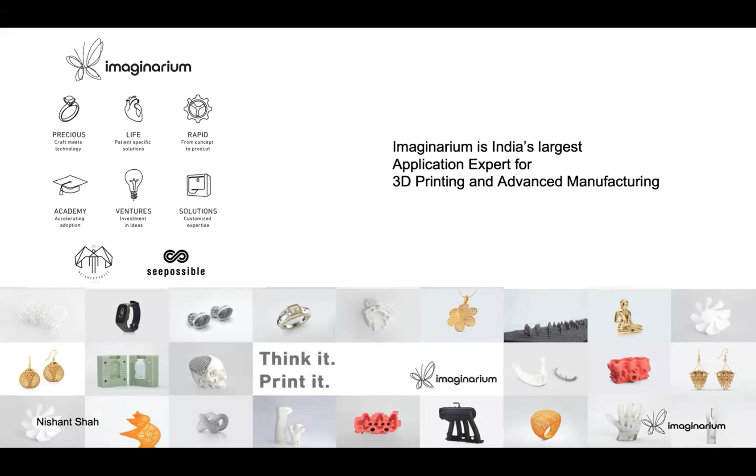To give you a brief about Imaginarium, we have been a service provider of 3D printing and other ancillary services for over 15 years now. One of our verticals, Imaginarium Rapid, also deals with automobile industries extensively, right from the OEMs to the tier 1 suppliers to part manufacturers. I'll give you a brief about Imaginarium later in the presentation, but I'll quickly jump on to what we do for the automotive industry.

So here are some of the kind of parts and applications that we currently work with within the automotive industries. Starts with visual models. Everyone needs a visual model. Everyone wants to look and feel and see how their next part or next car or next product is going to look like. So we do a lot of class A visual models for them.

Then we come to functional parts where we actually manufacture parts where they check the fit, form, and function. It might be a critical part, it might be a non-critical part. Then there is also a huge scope for spare parts, where there have been quite a few cases where a lot of companies have models which are almost redundant now, and it's difficult getting those spare parts manufactured because they're not in inventory or the designs have been lost somewhere. So we help them recreate and manufacture those spare parts. We also do a lot of changeover parts, jigs and fixtures, and obviously production parts as well, which is quite interesting.

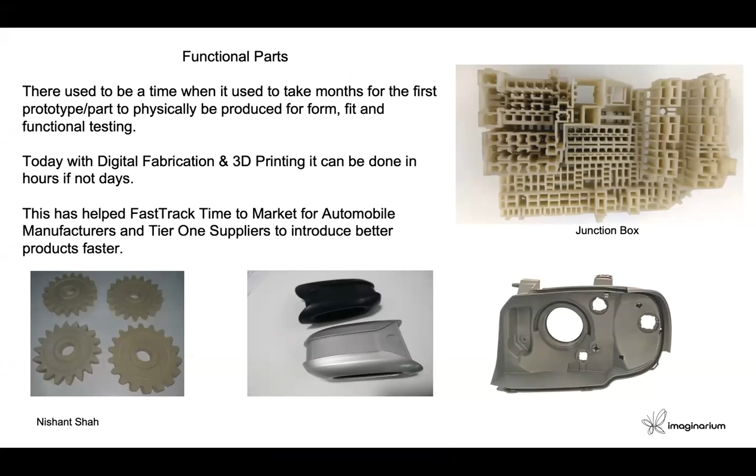Coming to functional parts - obviously as you all know, a few years back or maybe a decade back, it used to take months for people to get the first actual part after they've designed it, to actually test it for functionality, for fit, form, function. 3D printing has helped fast track this time, and it has come down to hours, if not days.

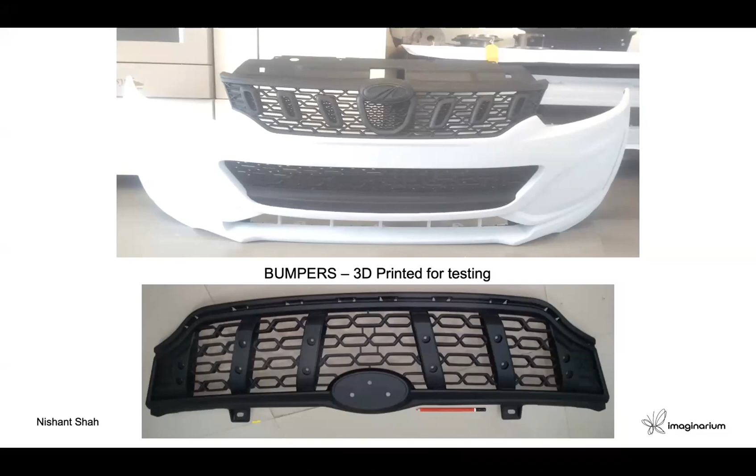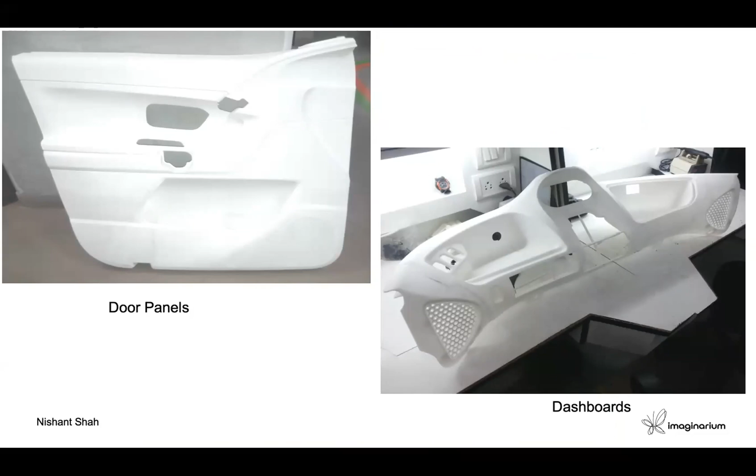Some examples are complete bumpers for automobiles. These are complete life-size bumpers fit on vehicles for fitment and aesthetic tests. We also have dashboards and door panels. These are all really large live parts which are then retrofitted into an actual vehicle, called a proto build, where the fitment and aesthetic values are checked before going into production.

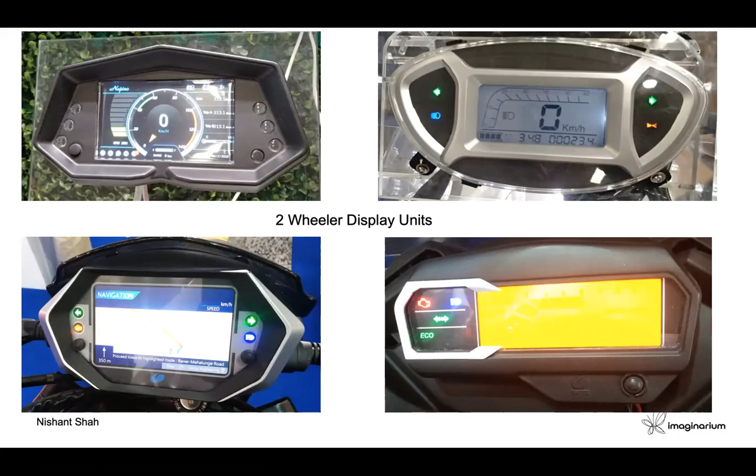Another opportunity is display units. Using transparent materials for 3D printing along with some conventional technologies, we're able to do display units for two-wheelers. These can go into shows or into actual vehicles for testing, and they are all functional parts, not just visual models.

Air intake manifolds are something we take pride in doing, and we've been doing it for over 3 or 4 years. The challenge with most air filter assembly and air intake manifold manufacturers was getting the real material - they wanted PA6 glass filled, which wasn't completely available back then. So we partnered with Solvay, a materials manufacturer, and dedicated one machine to developing this PA6 glass filled material. We did multiple trials over 6 or 7 months and proved we could print in polyamide 6, 20% glass filled material.

Currently we're the only company that can print exclusively in this material from Solvay, and it's really helping automobile tier one suppliers, because when they need to do leak tests, heat tests, and other testing, they now have a real material available for these kinds of tests.

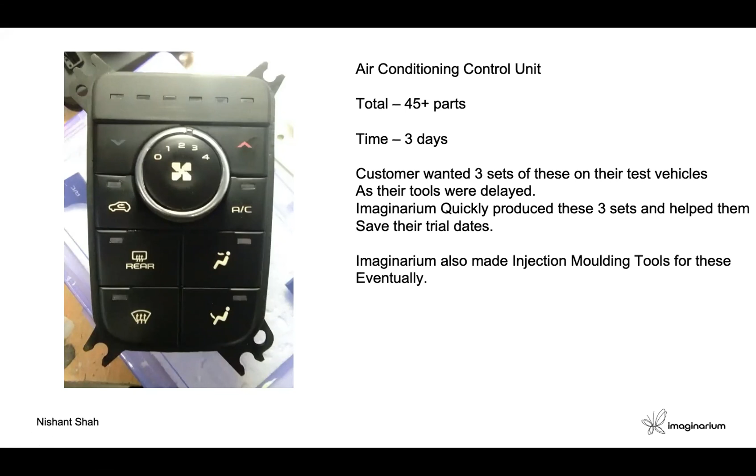Because of this, we also got to make the injection molding tools for this, which we completed in 3 weeks.

We work with a lot of foundries working with tier one suppliers and OEMs, where making casting masters used to take a couple of weeks. But now with 3D printing in PA12, we can easily burn out this material. We've conducted several tests and it's been proven - a great application that a lot of foundries have started using.

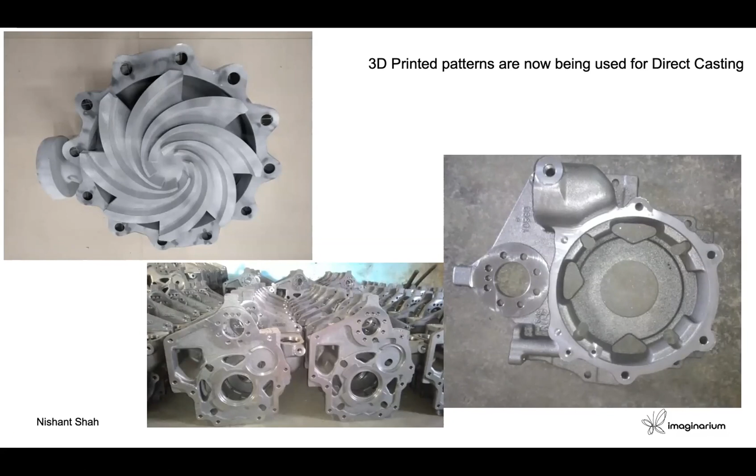Another application we see is customized products. We believe that in the coming era, it's going to be mass customization over mass manufacturing. A lot of companies like Royal Enfield, and we've done some parts for Bentley, have much lower annual volumes than normal cars since their vehicles are exclusive. They want to add more value when a customer buys their vehicle, so they want to customize each vehicle to each customer. That's where we can help with 3D printing.

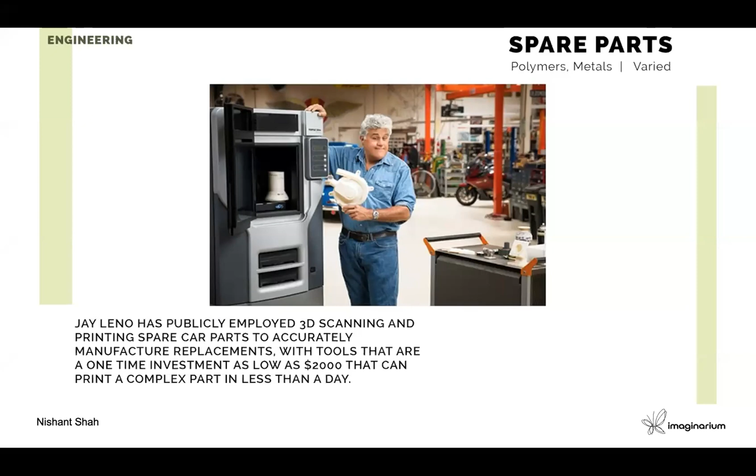Jigs and fixtures is another area where 3D printing is helping the automotive industry. For a lot of sheet metal components, jigs and fixtures are mandatory and required. Currently they use metal, casted parts which are traditionally made, but they come in a particular fit form. With the power of 3D printing, we can customize it to each part so they don't lose out on the critical areas where inspection needs to be done.

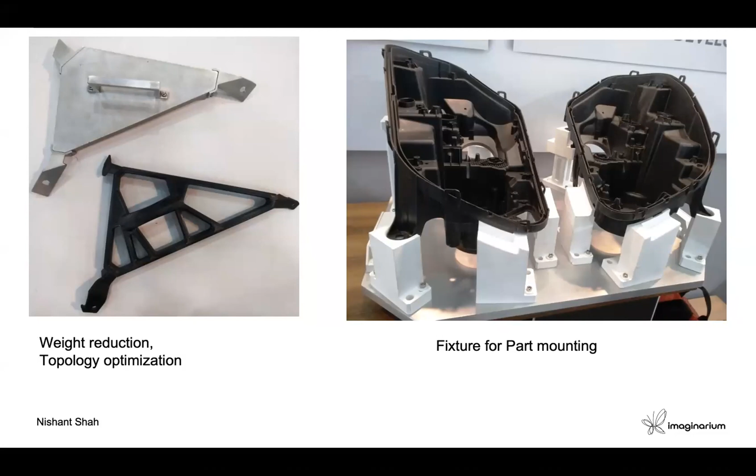Here's a great example of a company called Divergent that built the world's first ever supercar completely using 3D printed parts. Because they didn't have to invest in any mold or tooling costs, they managed to reduce the capital cost by almost 1/50th. It's a great example of how companies across the world are accepting and using 3D printing, finding different applications that might help the automotive industries.

Speaking of metal 3D printing, another area is conformal cooling channels for injection molding. Conformal cooling channels help reduce cycle times and get cooling at areas that were impossible to reach before, which previously caused aesthetic issues or shrinkages. With this, you can make conformal cooling channels that are quite complex and otherwise not possible.

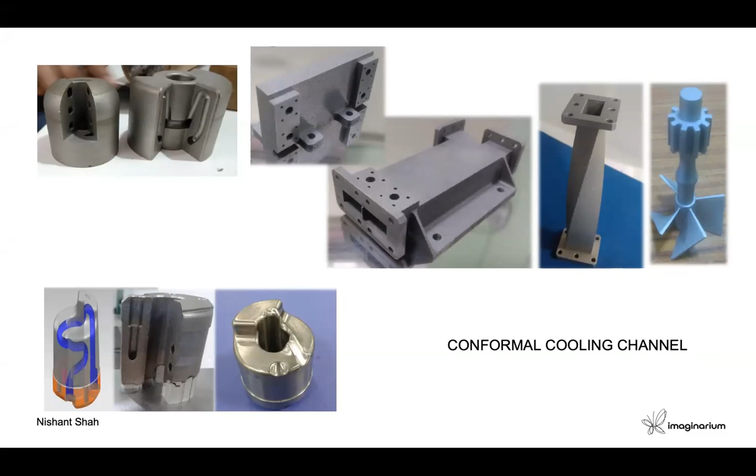This is a great example of using 3D printing for end use applications or production parts. One of our OEM customers came to us with an issue: they needed a bevel gear for an air conditioning unit, and their supplier had lost the injection molding tool. They urgently needed almost 1,000 of these because vehicles were rolling out, and asked how we could get them quickly in 2 to 3 days. We did a quick test, had them run revolution tests and whatever needed to be done, and it got proven. We printed 1,000 parts for them in 3 days and supplied them, which were fitted on a real vehicle. There are hundreds of similar examples where we've used 3D printing for end use and production parts, not just prototypes, visual models, or jigs and fixtures.

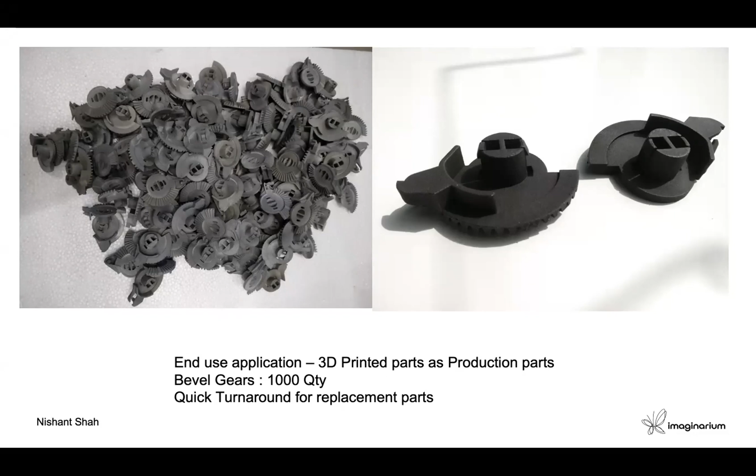Again, because of confidentiality issues, I'm not able to share that with you currently on this platform, but I can tell you there are some critical engine parts, some interior parts which we directly 3D print and which goes onto the vehicle. There are some side mirror assemblies that are being done like that. We also tested a gear assembly for one of the OEMs where again we use polyamide 6. So a complete gearbox was printed and tested and put on a vehicle.

I'm on the last slide. So, in a nutshell, I think today nobody wants to hold unnecessary inventory, unsustainable materials and technologies. No one wants long lead times. No one wants non-validated designs for production.

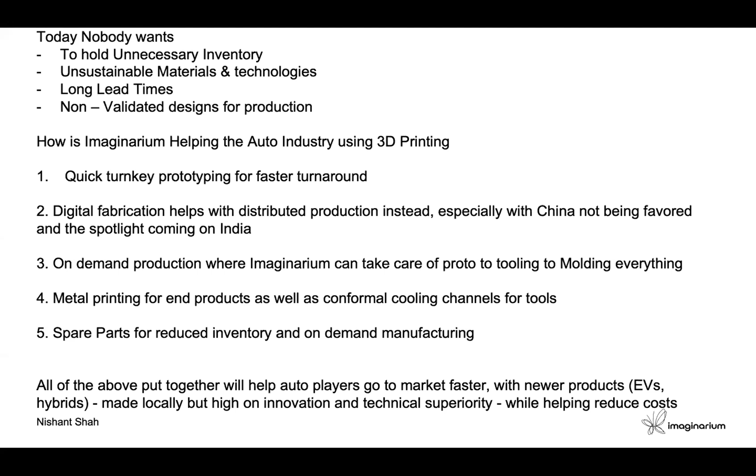So how Imaginarium is helping in this endeavor is we offer quick turnkey prototyping for faster turnaround. Obviously, digital fabrication helps with distributed production instead, especially with China not being favored right now. On-demand production where Imaginarium can take care of proto to tooling to molding to everything. Metal printing for end products, and of course spare parts. So all of the above put together will help auto players to go to market faster with newer products.

Just quickly about Imaginarium, we as a group have 6 different verticals. Precious is our vertical, which is completely focused on accessories and jewelry and on-demand manufacturing for that, where we use 3D printing and then directly cast in gold, brass, bronze. Life is our arm where we are working with doctors, medical staff, hospitals, and we do anatomical models, surgical guides, customized implants. Rapid is our engineering arm where we offer 3D printing services to industries like automobile and FMCG consumer goods. But also along with that, we do CNC machine parts, injection molding, sheet metal, vacuum casting. And then we've got Academy, as the name suggests, we do training courses.

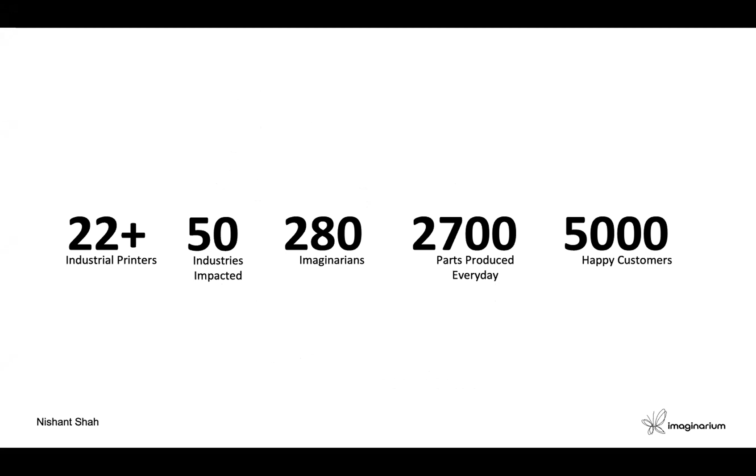We've got ventures where we invest in companies, and we've got solutions where we represent a lot of companies like HP and Oerlikon, Rapid Shape, and we sell their printers, hardware, and software. We have about 22 printers. We impact 50 industries. We are about 280 people strong. We are manufacturing 2,700 parts every day, and we've got 5,000 happy customers. What we believe is if you can think it, we can make it. Thank you.

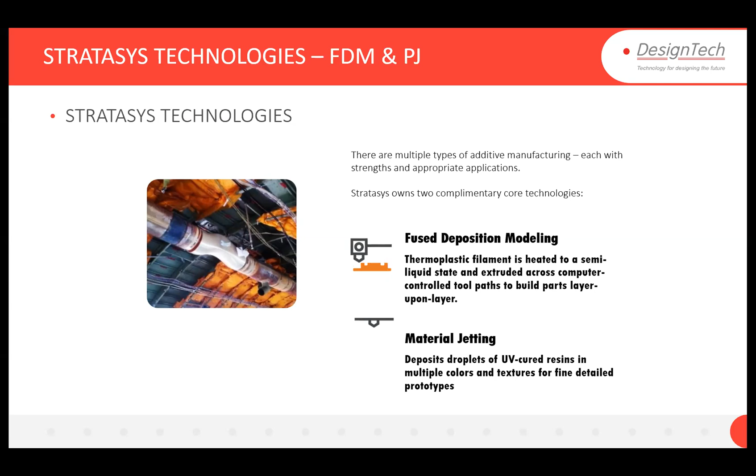I have a video that talks about Stratasys technologies. It covers various verticals, and there's an automotive video very exclusive to the automotive world which I'd like to present. But before that, these two distinct technologies are so very complementing to each other.

With the inkjet technology, we are working with liquid resins as raw material. Very fine feature details are captured, multi-material outputs, end product realism, you can name it. What you have as a final product today in colors, clear parts, opaque parts, details of the company, details of every given product, details etched on the packaging - all that can be realized by a single push of a button. That's today's PolyJet for you.

Whereas when you look at FDM, it's more versatile. The reason being we are working with thermoplastics, industrial grade thermoplastics. The filaments extruded on a build platform are very wide in nature - you have multiple grades of ABS, ASAs, nylons, carbon fiber filled nylons, Ultem, and PEKK, polyether ketone ketone from Stratasys.

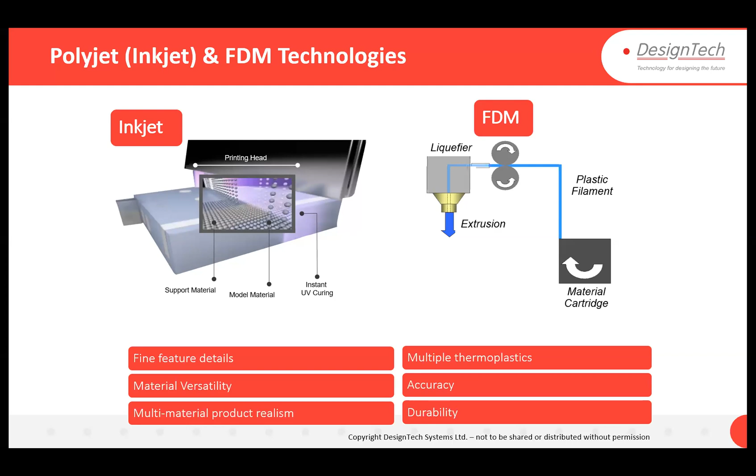So quite a lot. However, when we talk about these complementing technologies, each has unique applications, which I'm going to talk about in terms of what these materials from both technologies represent to the automotive world and how manufacturing is influenced by Stratasys technologies.

Before that, as I mentioned, this is the 32nd year in the industry for Stratasys's patented technology. As a publicly traded company on NASDAQ, Stratasys has dual headquarters. The FDM technology originated from Eden Prairie, Minnesota, USA, and the PolyJet technology is from Objet Technologies, which after merging with Stratasys is based in Rehovot, Israel.

There are multiple patents, including pending patents for Stratasys, and these are industrial grade 3D printers that you get to see from Stratasys.

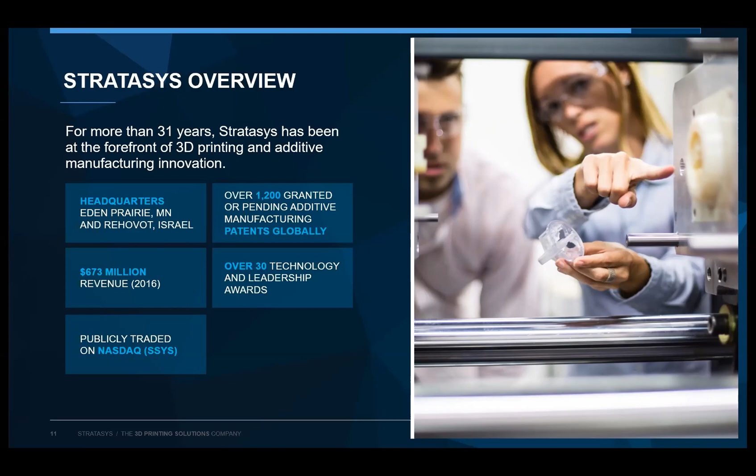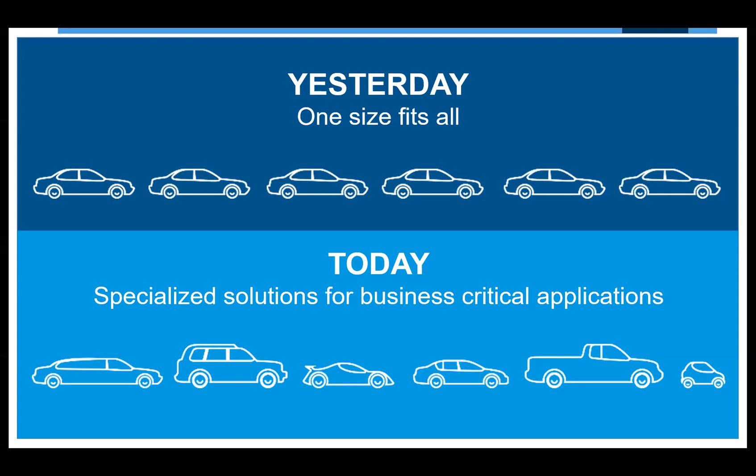While talking about automotive, in the earlier days sizes were not very customizable. They were standardized, so that it could fit anyone's needs. But today it has changed. The specialized solutions that the auto industry offers today are due to demand and business critical applications, for which there has been a fashion.

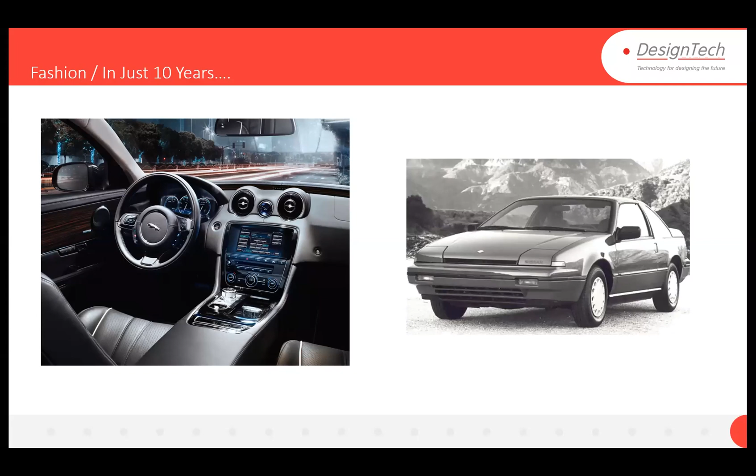What you get to see, exteriors have changed over the years. Today, when you look at the interiors and exteriors of automotive, there's a wide influence. Without 3D printing, probably these newer designs would not have rolled out in such quicker timelines. That's exactly what we are going to focus on. All the majors in the auto industry, whether Audi, BMW, all of them users of Stratasys technologies, including Honda, and quite large, big names in the Indian auto world, are users of Stratasys technologies.

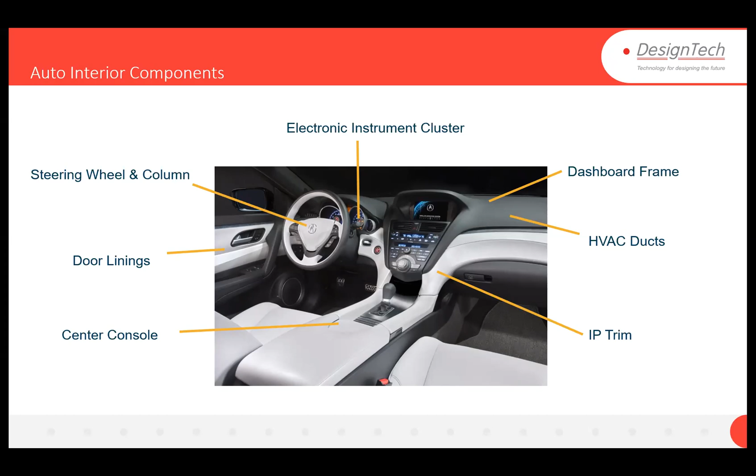When we talk about interior components, these are some of the outputs, reason being that with multi-material PolyJet technology, you'll have the consoles printed as a final product with fine details. That's exactly what you capture. Multi-material 3D printing talks about how auto industries benefit, rather than getting into extended post-processing to complete their final product designs. Today, solutions from Stratasys mean multi-material outputs as end products can be realized in quick turnaround time.

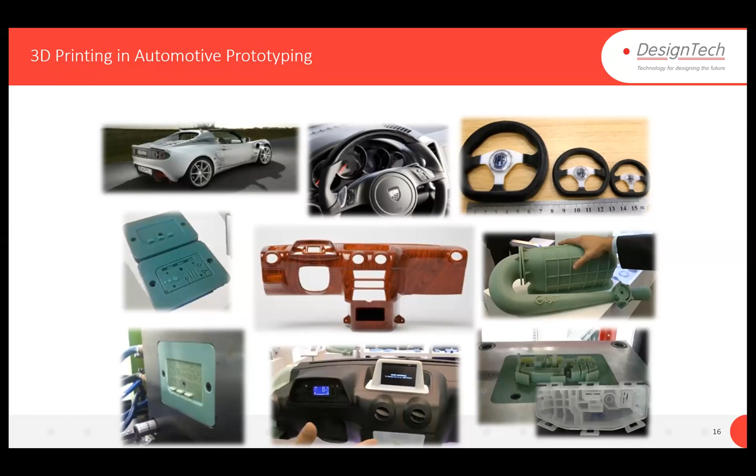I have a video for you all from Stratasys that talks about how to achieve all these different details. You get to see quite a lot of pop-ups, whether it's the dashboard, or multi-material steering wheels with soft touch over-molded along with rigid details and company logos all etched in a single print. Or printing resin-based core and cavity to get your desired plastic outputs, all on a single machine. That's what Stratasys technology is all about.

So Stratasys innovation for the digital factory is the focus in today's discussion for the auto industry, and that's where we are going to lead the way today. This is a video which speaks about Stratasys.

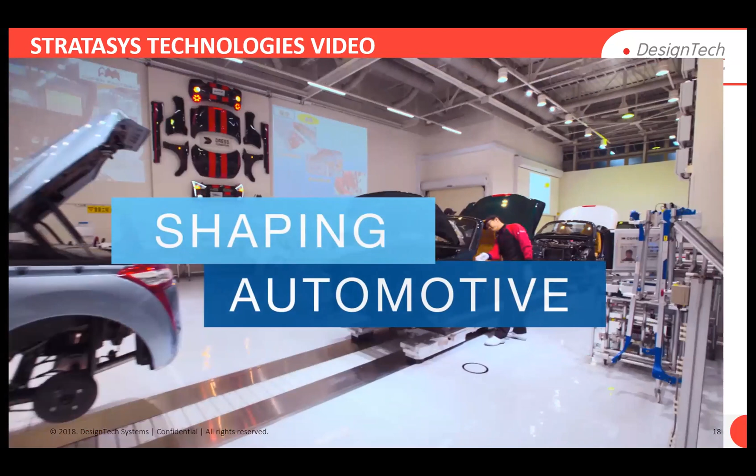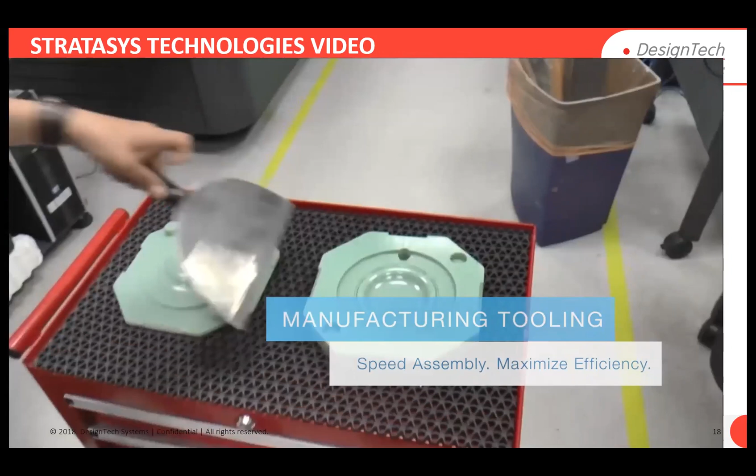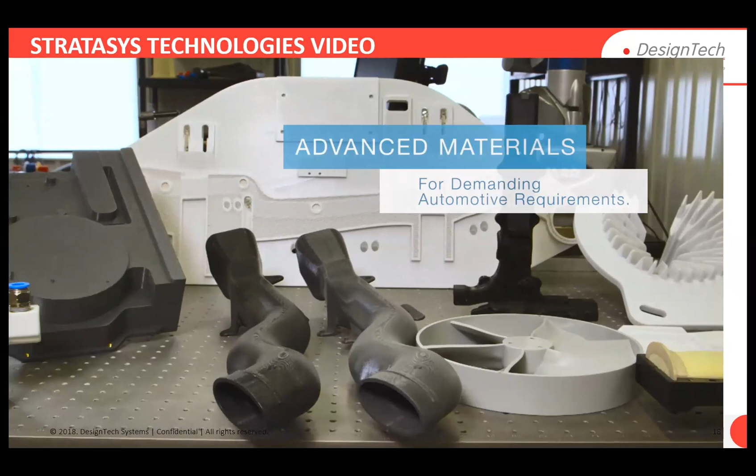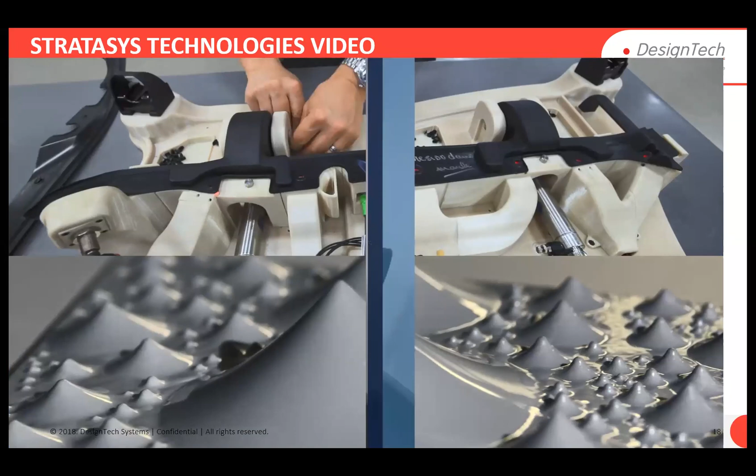Over the past quarter century, the automotive industry has seen remarkable advancements in manufacturing and technology. Helping shape that change has been Stratasys. Since our inception, we've been at the forefront of unleashing the imagination of designers and manufacturers, bringing their ideas to life with speed and efficiency. Stratasys prototyping capabilities have shaved months and even years off the development process, reducing investment and part costs dramatically. Automakers and suppliers of all types have realized the benefits of Stratasys 3D printing, and we've seen our technology go from the design studio to the factory floor with the adoption of custom 3D printed tools, jigs and fixtures, tryout parts, and low-volume injection molding. We are reducing manufacturing costs and maximizing assembly line productivity. Stratasys can be found on the line of some of the world's premier automakers, helping them speed manufacturing time and reduce the weight of production tools. Stratasys is shaping the way cars are being imagined, designed, and developed. Production parts can now be 3D printed in small volumes and even manufactured as part of the final vehicle. Lightweight end-use parts are reducing production costs and increasing fuel efficiency. And with next-generation materials and technologies, Stratasys is positioned to help shape the industry for years to come. Stratasys offers a wide range of 3D printing materials for demanding automotive requirements, from clear and rubber-like photopolymers for detailed scale models to tough, high-performance thermoplastics for extreme real-world environments. We empower automotive manufacturers to stay one step ahead of industry challenges with cutting-edge engineering solutions and a range of additive manufacturing technologies for custom applications. Stratasys is shaping more than tomorrow's automobiles. We are helping shape the innovations, creativity, and manufacturing capabilities of those who drive the industry forward.

So that's been Stratasys for you. In the video, there's been quite a lot of coverage talking about the materials which are so well associated to provide you with tooling applications. Now, while we talk about tooling applications, we speak about thin skin tooling for composite layups, coordinated tool families, soluble cores.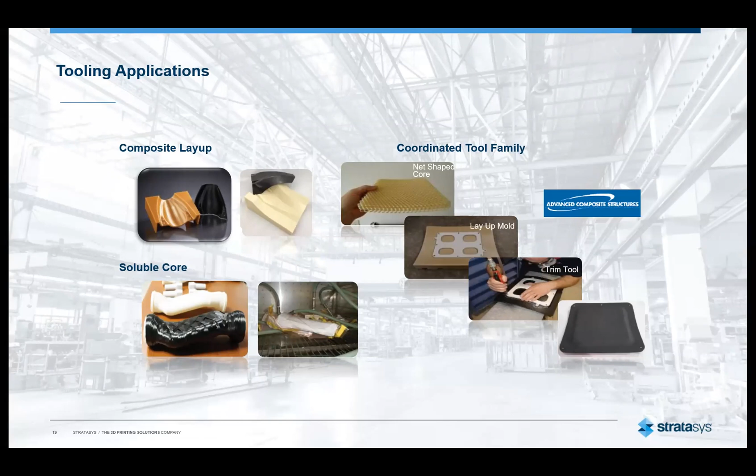Assembly and automation tools are being printed out. Either you start from the most versatile ABS and ASA materials, or you can get into polycarbonates and beyond, which are the Ultem grades. Today you have metal that could be formed with 3D printed plastic. That is Stratasys technology. Thermoforming, metal castings, you can name it. So the focus now is on quite a lot of manufacturing tooling at auto industries.

We have had quite a lot of success stories to talk to you about, but also to mention, when we speak about manufacturing toolings, a wide variety of jigs and fixtures which could optimize the manufacturing lines is exactly what is in focus today. The demand is that traditional manufacturing takes time and is too expensive with multiple parts.

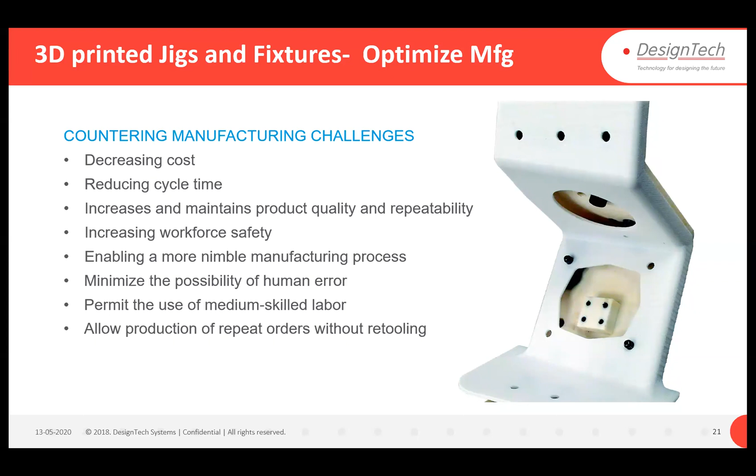However, the value add when you have 3D printing is adding to the complexity. You also have quite a lot of light weighting, which means cost-effective solutions, quick turnaround time. Maybe you can also think about having your workforce safety. That's exactly what jigs and fixtures offer for you. Cost savings, time savings, huge. And you also have the digital inventory without the physical inventory to support your manufacturing lines.

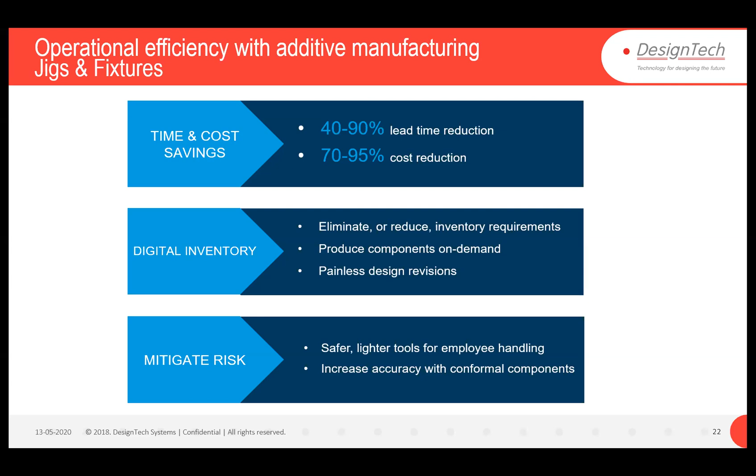Thereby enabling that whenever there are components on demand, strong, durable materials associated with Stratasys technologies enable you to print parts that could be used as final production parts or end-use parts, enabling lighter tools for employee handling, which means worker comfort is well addressed. So the generic materials on the FDM portfolio associated with these durable jigs and fixtures, whether it's for assembly, manufacturing lines, or CMM inspection.

When we talk about fixtures for work holding devices on the CMM machines, there are quite a lot of value adds. The concept of designing for traditional, which means multiple parts, is not what additive is looking forward to. You'll have design freedom with which you can be as creative as possible to design your fixtures.

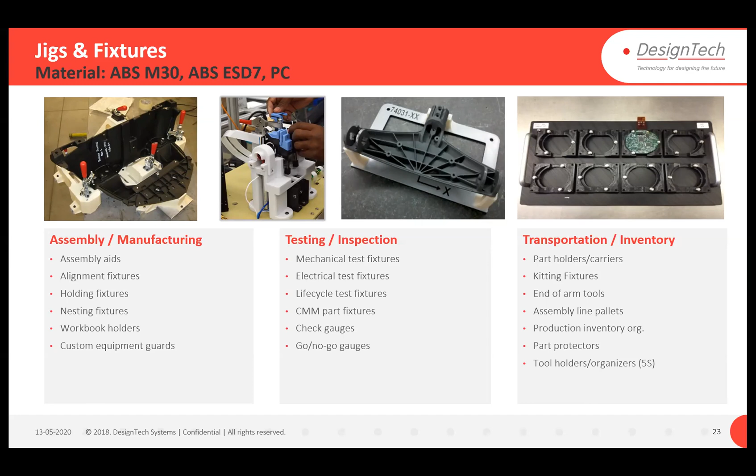While we talk about some of the automotive case studies, there are quite a lot which speak about lightweighting of these fixtures. And all this happens in a matter of few hours, supporting manufacturing lines. So when we have the advantages of manufacturing tools that can be produced, here you have design or part consolidation, which is very unique to additive.

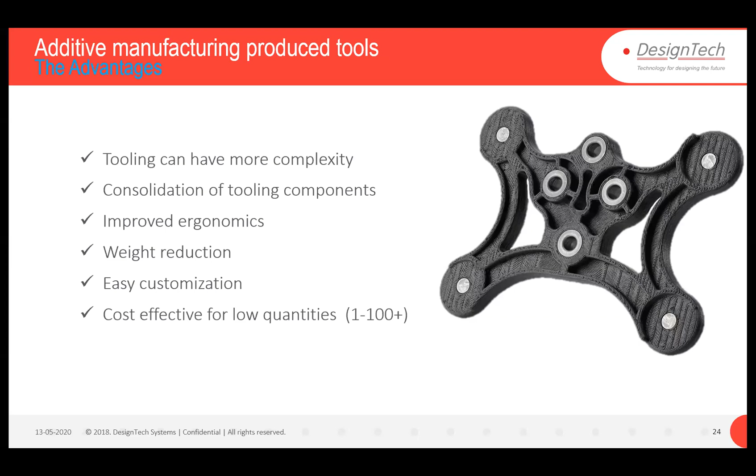You limit the part numbers in an assembly, and wherever there are cutting tools employed on these tooling fixtures, you will be able to have those hardened jig bushings, thereby making hybrid fixtures that could suit your manufacturing requirements. So some of the materials associated with the manufacturing lines and for supporting the varied applications that are so very demanding is what we are going to take a look at.

Primarily, while we talk about the most versatile material in the FDM portfolio of Stratasys, it's ABS M30. So here you have a case study from BMW. The metal fixtures have got replaced with lightweight 3D printed organic shaped fixtures. A new way of designing, completely changing the concept of traditional designs that have been made, and more creativity when you have to think about organic shapes in the designs.

Worker comforts have been addressed. Think about those narrow handles and the organic shaped handles that we are providing today. That is creativity. And this fixture takes just 1.5 days instead of close to around 2.5 weeks of manufacturing using CNC. Huge cost savings on an A-class painted surface of a car.

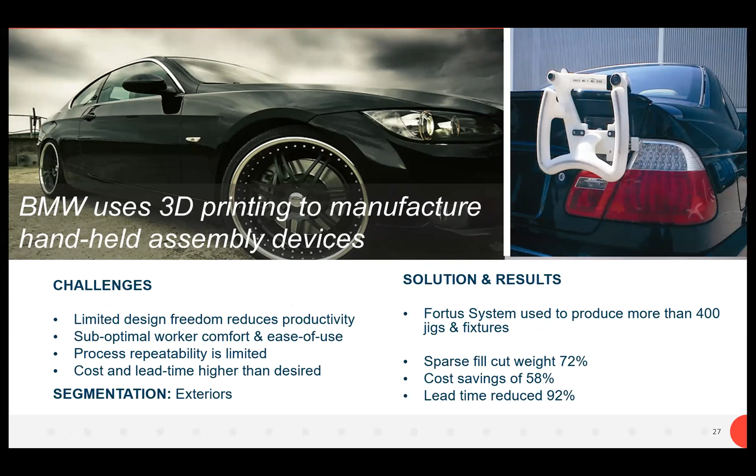Here BMW talks about, for every vehicle variant, there are multiple jigs and fixtures that have been 3D printed using Stratasys technologies primarily. So the major advantages and the results they've been able to see with the Fortus production series machines are sparse fill outputs, which means lightweighting, cost savings, direct cost saving because you're using lesser material, and quicker turnaround time.

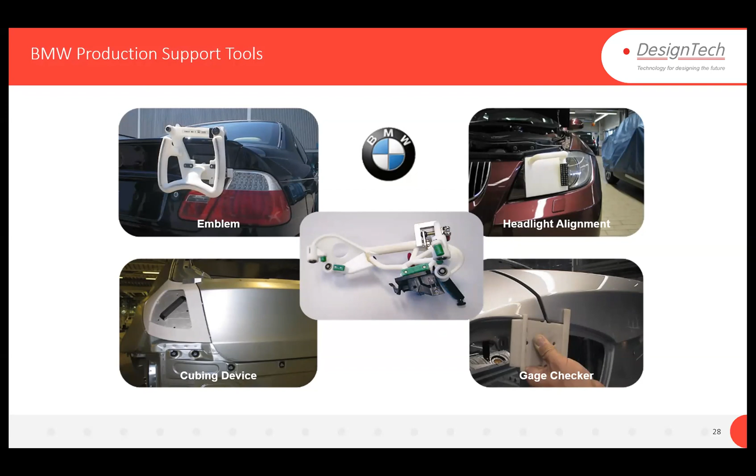And that's exactly for you, more complex geometries. So BMW has some samples here: emblem placement fixtures, or under the hood assembly fixtures, which is the middle image, so very complex in nature for traditional manufacturing, has got hybrid components for quick fastening and so on.

So these are tools designed for functionality, without having to compromise on the ergonomics. When we talk about the functionalities, there's no compromise. These are so well suited to meet multiple usage on the shop floor, thereby enhancing productivity.

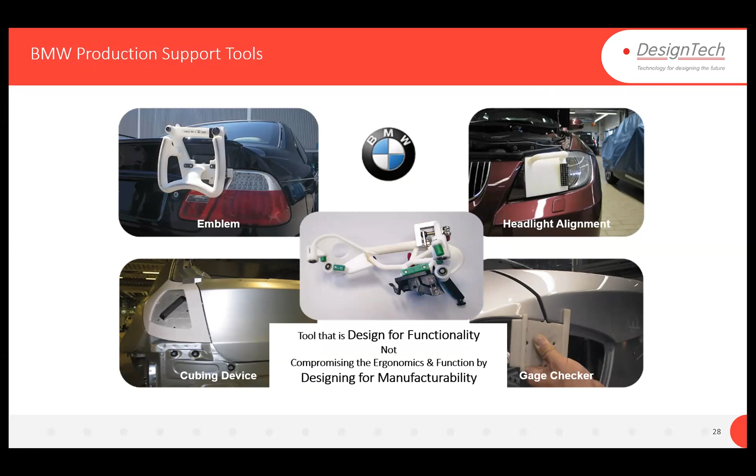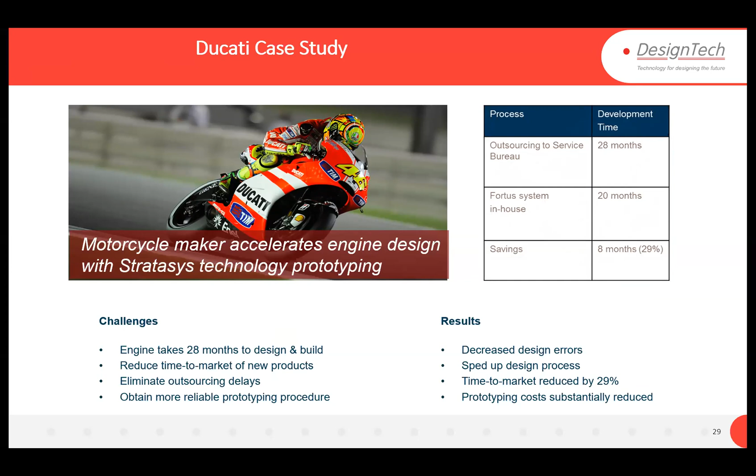Traditionally, they would have spent 28 months, but with the complexity and the 3D printed outputs assembly, they were able to save 8 months, which substantially saved quite a lot, meaning 29% of time savings. Other majors like the auto industries in India - these snapshots you see are all fixtures that have been rolled out from the FDM technology of Stratasys.

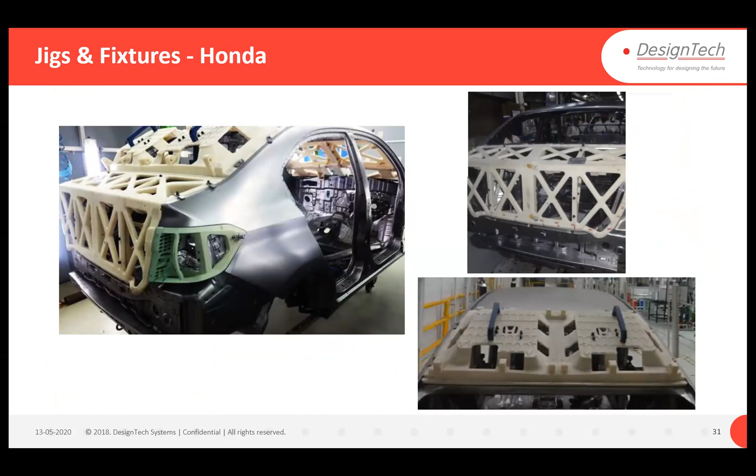Lightweighting, whether it's the trunk lid or the rear windshield fixtures. Earlier it was too complex carrying those metal fixtures or using direct windshields for checking the gap. But today, lightweighting and customized designs have made way for auto majors to adapt to Stratasys technologies. That's exactly what you get to see here.

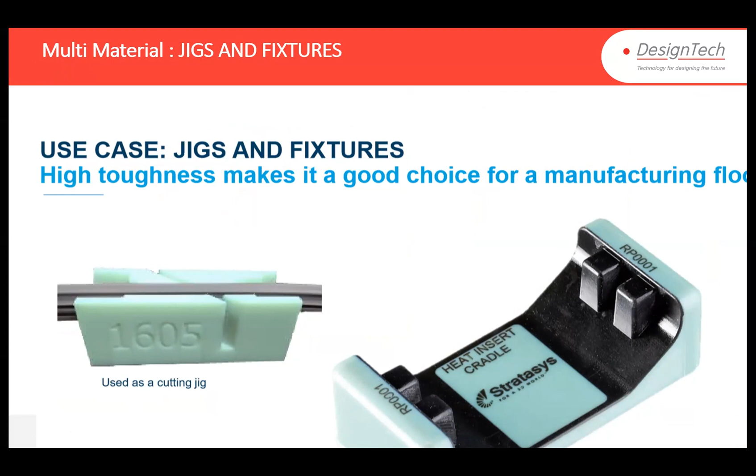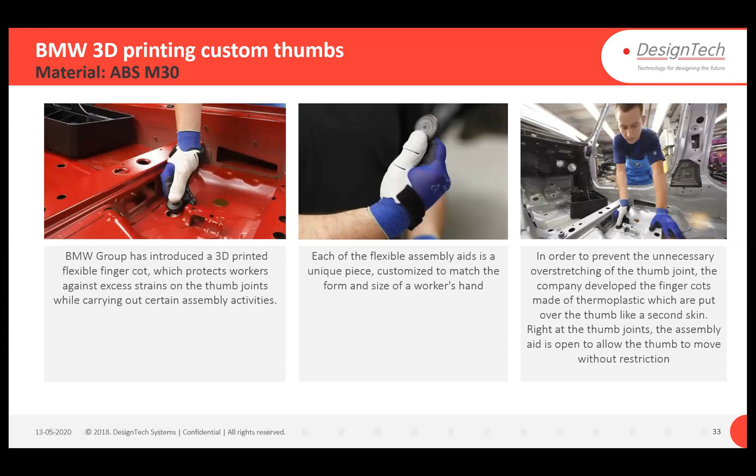When it comes to worker safety, look at the creativity. Working with ABS M30, using Stratasys technologies, BMW Group have enforced strict worker safety and worker comfort. When workers have to be scanned for their thumb impression, the overall thumb has been scanned and 3D printed with ABS. This flexible support enables that once sheet metal, complex sheet metal components have been lifted and carried for assemblies, etc., or when checking has been done, there are areas of hurt that workers would otherwise face.

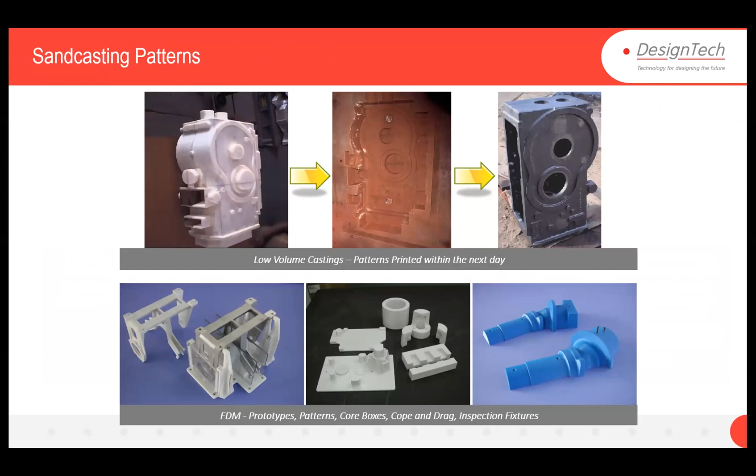These custom thumbs which have been printed enable quite a lot of safety, and it also provides and promotes productivity. Patterns for sand casting: primarily here we talk about using ABS as a material, ABS cope and drags, and these have been tried and tested for very many decades. Multiple case studies in India have been rolled out using Stratasys FDM materials, complex patterns, lightweighting of metal parts, all associated during the development cycle.

Well before the complex tooling can be generated, these are very handy to meet a few thousand numbers. So let us take a look at polycarbonate, again a high tensile strength material from FDM, used for manufacturing tooling, like blow molding tools have been manufactured. Strong production parts and manufacturing tools have been generated using polycarbonate on FDM technology.

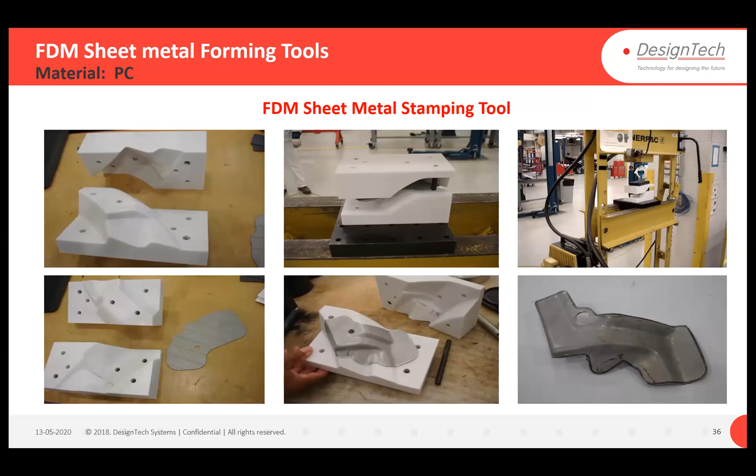Polycarbonate materials for metal forming. Now this is exactly where you get to see that the complexity of CRCA, cold rolled close annealed sheets, have been formed on a hydraulic press. Thermoforming and various metal forming applications are all best suited with the polycarbonate material.

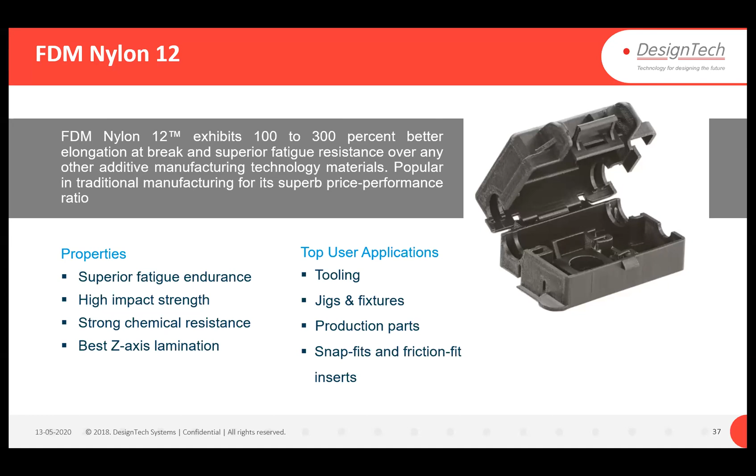Now when you look at nylon 12 in the FDM portfolio, for fatigue endurance this is a very versatile material. It has very strong chemical resistance as well as high impact strength, which means tooling applications are best suited, again with the choice of applications on the shop floor. Snap fits, friction fit inserts, all these are possibilities with nylon 12.

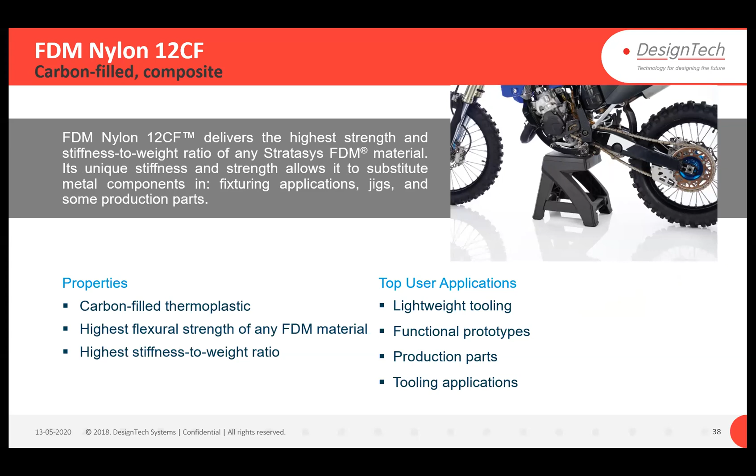Now the next grade of material is nylon 12 carbon fiber filled. This composite material gives enablement to have lightweight tooling. There are FDM materials when we talk about high strength, durability, lightweighting, production parts, and end use parts. There, the tool that has been printed using nylon 12 CF can take the entire load of the bike. And some more nylon 12 CF outputs.

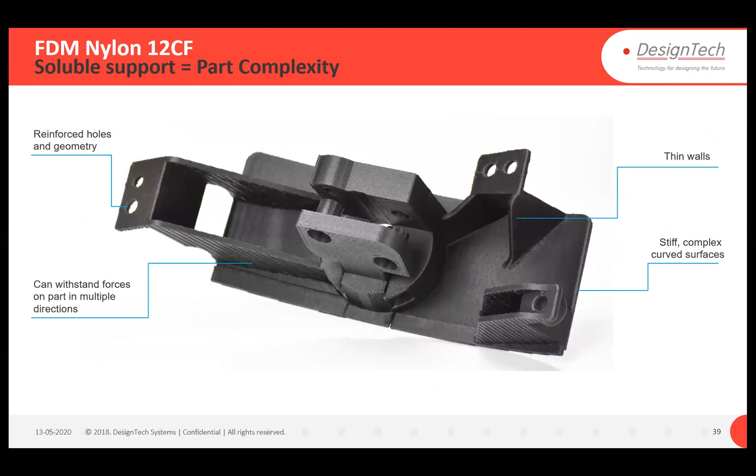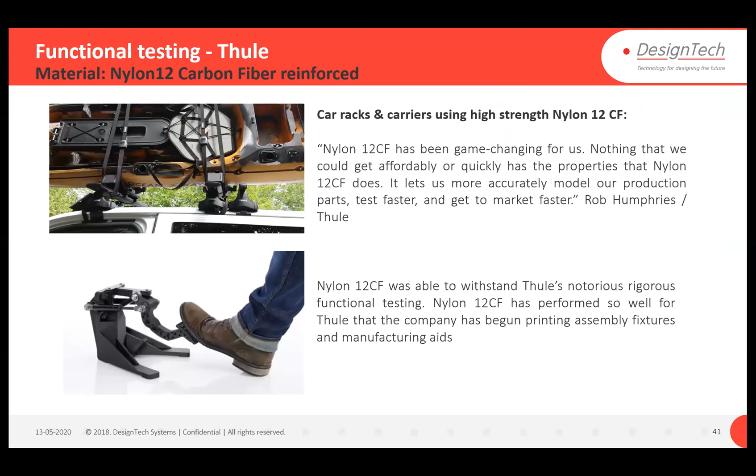So these are some of the various value adds where you will be having quite a lot of thin walls and thick walls, but more importantly, it is the soluble support material which gives enablement to have complex geometries that have been tested well before the designs can be frozen. That's exactly how you're able to advance and keep moving forward.

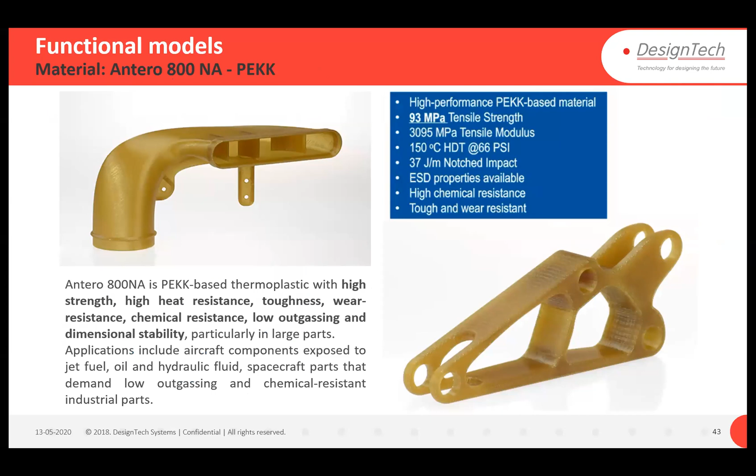Now the polyetherketoneketone, which I had mentioned about, is again a thermoplastic, which means high chemical resistivity, highly strong and durable outputs for the aerospace and automotive industry. This means low outgassing as a material with very high dimensional strength and stability, empowering automotive industry to have strong tooling that could be made using this particular material.

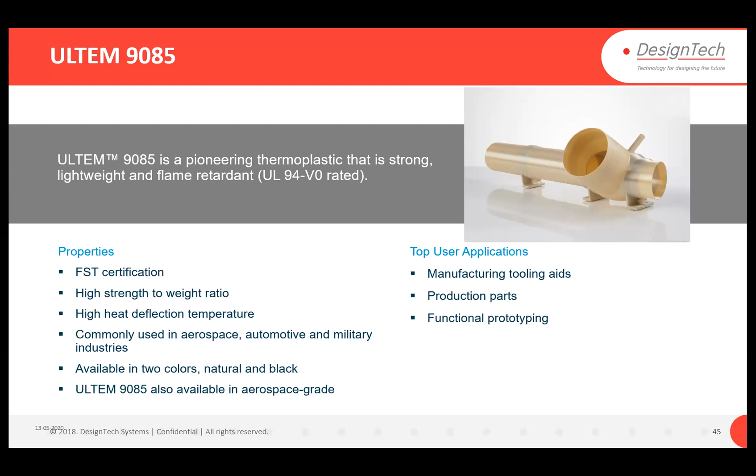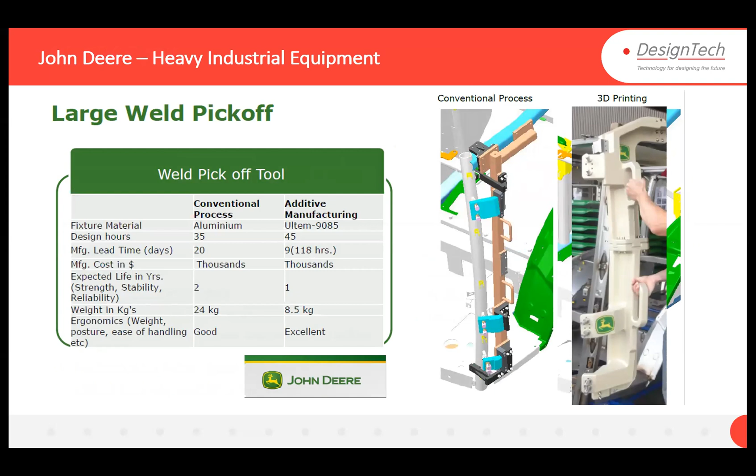Apart from the nylon and Ultem grades, now to talk about the FST certified - flame smoke toxicity certified, FAA approved material - is the Ultem 9085, which comes in two different colors, for aero industries as well as automotive industries. Quite a lot of value add from metal fixturing to using Ultem grades of material, or even sheet metal thermoforming using Ultem grades. These have been case studies where in one day you can make a metal forming tool.

Yeah, thank you. In the next 30 seconds I'll be completing this. So thin skin tooling, carbon fiber tooling, you can name them.

These are the great value adds that are supported, but needless to say that you also have the TPU material, thermoplastic polyurethane, in the F-series machine.

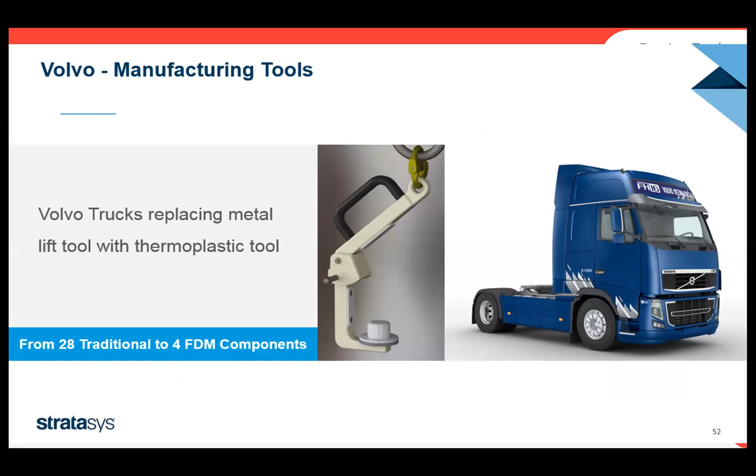Now look at some of the value adds using Stratasys as a technology: 28 traditional components reduced to 4 FDM parts, which means part consolidation. Plastics are so very strong.

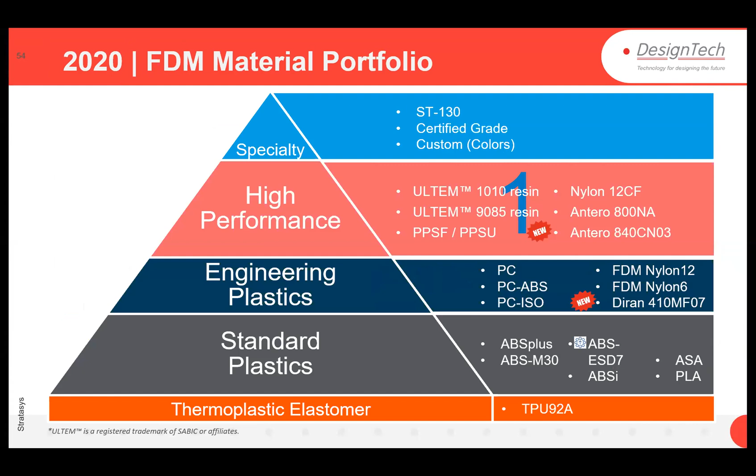So very quickly, various value adds of design freedom, lattice structures, complex filigree structures, you can name them. That is a unique advantage of working with 3D printing.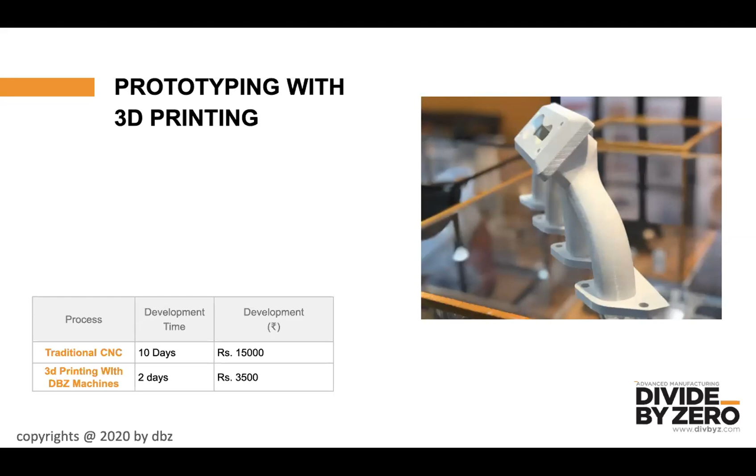When you have a component like a fixture, where every component is different in shape, you need a separate fixture, a separate tool, and a separate code every time it's worked upon with CNC machining. But with 3D printing, it can be much faster because on a 3D printer bed, we can put up all these fixtures together and they'll be printed in one go, without any tool change requirement, without any change in raw material size or function. And the coding part is much easier too.

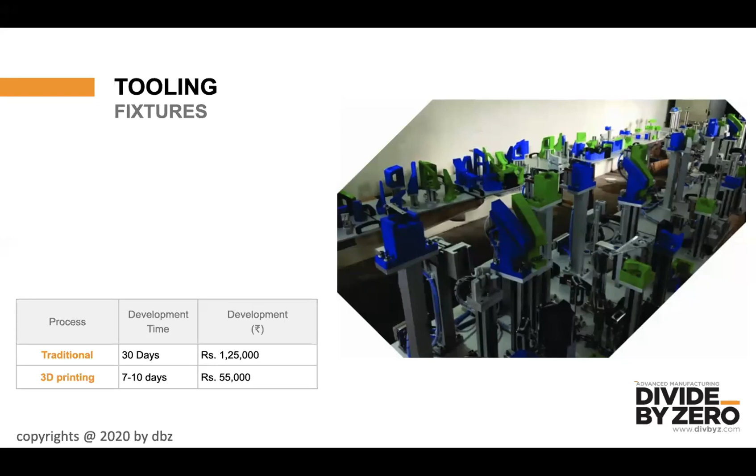Again, investment casting and sand casting - both my friends have already discussed a lot about it. But we have also worked and developed a specific material with very low ash content, close to 0.7%, on the deposition technology side. We're also working on and have developed India's first laser sintering, SLS powder-based, polymer-based SLS machine. On that as well, we've developed this material, which can be used in investment casting when you need components printed quickly and directly - those can be investment cast in standard processes.

Packaging and handling solutions - vacuum forming has already been discussed, but there's a very interesting case study here. On the packaging side, the nature of 3D printing, the way it's built, is inspired by nature - the way honeycomb structures are made, or the infills inside the 3D print itself, which can be made open or closed, or variable. Through this we can make pulp packaging or vacuum forming tools using these machines, and these tools can be made overnight.

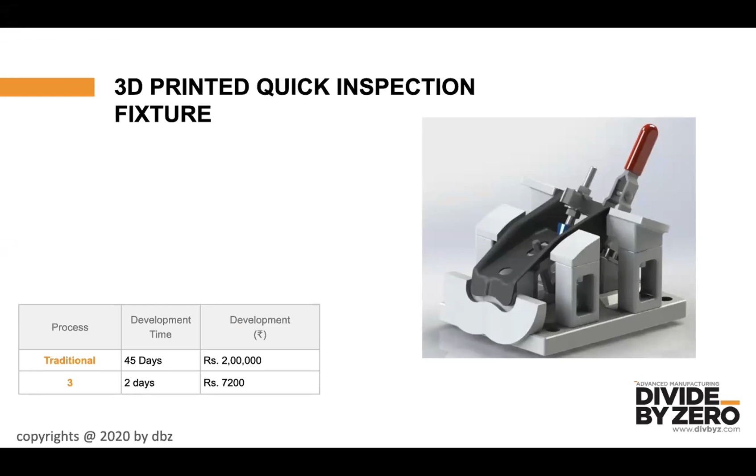So with this, I think these are the areas which I see will be very helpful for automotive industries overall, in terms of saving cost, time, and effort, looking at the current situation, which I could compile in a very brief time.

Another interesting side of this is traditional versus additive manufacturing supply chain. If you look at traditional manufacturing, you have metal resource providers, then a manufacturing facility, then you assemble these parts, and distribution happens. With additive manufacturing, there's a possibility where, with a lot of new technologies coming in, you can as well manufacture using 3D printers.

Basically, all you have is a database of design, and it can be fired through different printers through Industry 4.0. We have IoT-enabled machines which can store these designs on design libraries, and directly fire them through any location with given access, and get it delivered. This is a very interesting concept I wanted to discuss.

I wanted to show you a quick video about Divide by Zero and what we do here, about our journey. Let me just show it to you quickly.